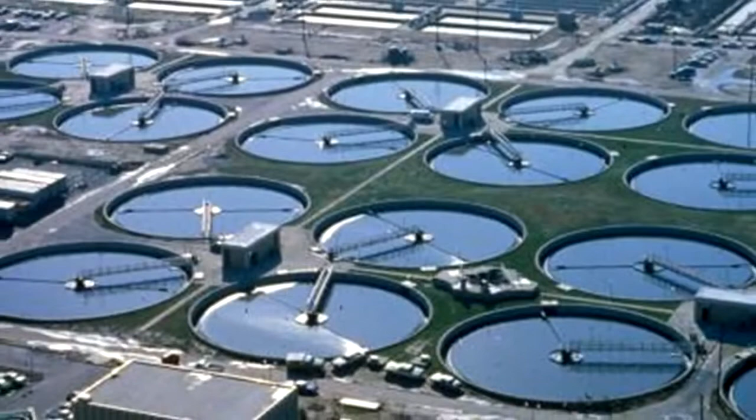Nearly everyone in the world is part of some community, whether large or small, and all of these communities have similar needs. They need light, heat, air conditioning. People can't function very well when it's too hot or too cold. They need food to be grown or provided, distributed and stored safely. They need waste products to be collected, removed, and processed. People in the community need to be able to get from one place to another as quickly as possible. And a supply of energy is the basis for all of these activities.

Energy in the form of electricity provides light and air conditioning. Energy in the form of heat keeps us warm, and energy in chemical form provides fertilizer, drives farm machinery, and transportation energy. Now, I spent 10 years working at NASA.

In the beginning of my time there in 2000, I was very interested in communities, but this is the kind of community I was thinking of: a lunar community. It had all of the same needs as a community on Earth would have, but it had some very unique constraints. And we had to think about how we would provide energy for this very unique community.

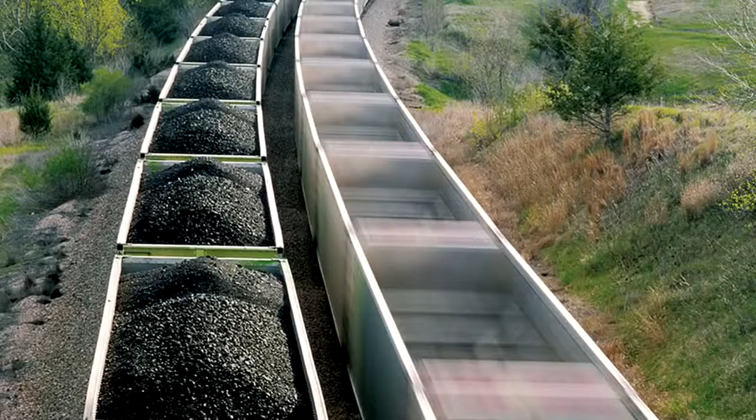There's no coal on the moon. There's no petroleum. There's no natural gas. There's no atmosphere. There's no wind either. And solar power had a real problem.

The moon orbits the Earth once a month. For 2 weeks, the sun goes down and your solar panels don't make any energy. If you want to try to store enough energy in batteries for 2 weeks, it just simply isn't practical.

So nuclear energy was really the only choice. Now, back in 2000, I really didn't know too much about nuclear power, so I started trying to learn.

Almost all of the nuclear power we use on Earth today uses water as a basic coolant. Now, this has some advantages, but it has a lot of disadvantages. If you want to generate electricity, you have to get the water a lot hotter than you normally can. At normal pressures, water will boil at 100 degrees Celsius. This isn't nearly hot enough to generate electricity effectively.

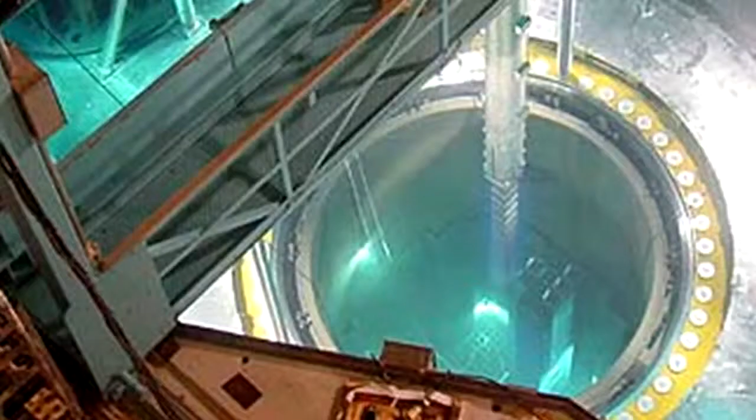So water-cooled reactors have to run at much higher pressures than atmospheric pressure. Some water-cooled reactors run at over 70 atmospheres of pressure, and others have to run at as much as 150 atmospheres of pressure. There's no getting around this. It's simply what you have to do if you want to generate electricity using a water-cooled reactor.

And this means that you have to build a water-cooled reactor as a pressure vessel with steel walls over 20 centimeters thick. If that sounds heavy, that's because it is.

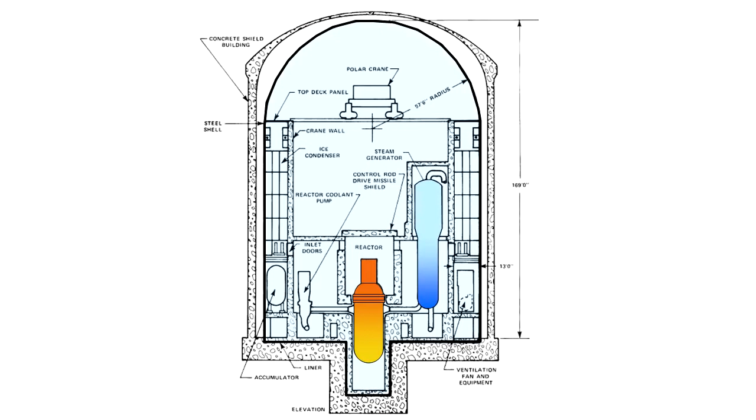Things get a lot worse if you have an accident where you lose pressure inside the reactor. If you have liquid water at 300 degrees Celsius and suddenly you depressurize it, it doesn't stay liquid for very long. It flashes into steam. So water-cooled reactors are built inside of big, thick concrete buildings called containment buildings, which are meant to hold all of the steam that would come out of the reactor if you had an accident where you lost pressure. Steam takes up about 1,000 times more volume than liquid water, so the containment building ends up being very large relative to the size of the reactor.

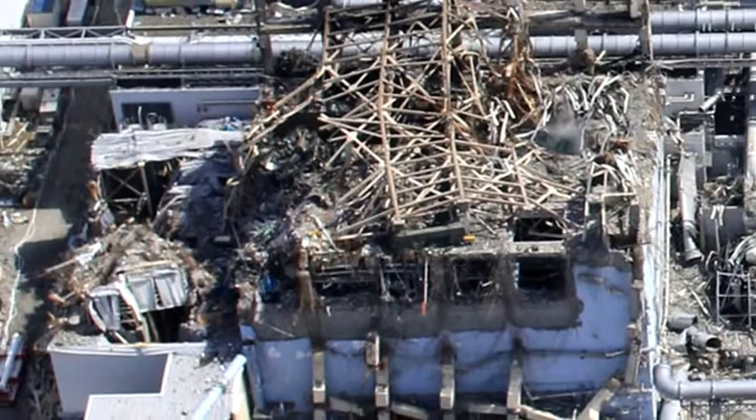Another bad thing happens if you lose pressure and your water flashes to steam. If you don't get emergency coolant to the fuel in the reactor, it can overheat and melt. Now, the reactors we have today use uranium oxide as a fuel. It's a ceramic material similar in performance to the ceramics that we use to make coffee cups or cookware, or the bricks we use to line fireplaces. They're chemically stable, but they're not very good at transferring heat.

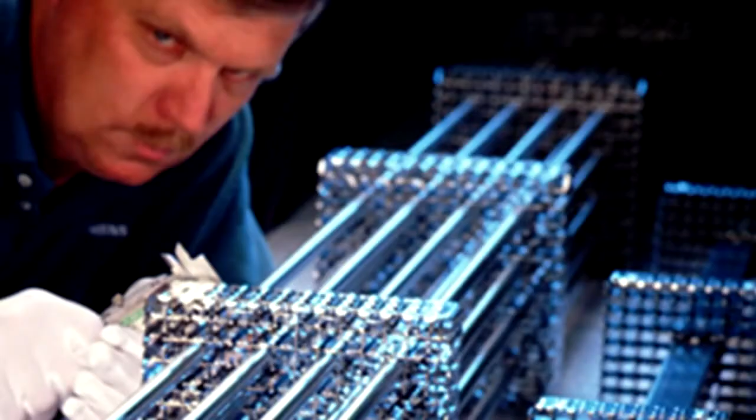If you lose pressure, you lose your water, and soon your fuel will melt down and release the radioactive fission products within it. Making solid nuclear fuel is a complicated and expensive process, and we extract less than 1% of the energy from the nuclear fuel before it can no longer remain in the reactor.

Water-cooled reactors have another additional challenge. They need to be near large bodies of water where the steam they generate can be cooled and condensed. Otherwise, they can't generate electrical power. Now, there's no lakes or rivers on the moon. So if all of this makes it sound like water-cooled reactors aren't such a good fit for a lunar community, I would tend to agree with you.

You see, I had the good fortune to learn about a different form of nuclear power that doesn't have all these problems for a very simple reason. It's not based on water cooling, and it doesn't use solid fuel. Surprisingly, it's based on salt. One day I was in a friend's office at work, and I noticed this book on the shelf, Fluid-Fueled Reactors, and I was interested and asked him if I could borrow it. Inside that book, I learned about research in the United States back in the 1950s into a kind of nuclear reactor that wasn't based on solid fuel or on water cooling. It didn't have the problems of the water-cooled reactor, and the reason why was pretty neat.

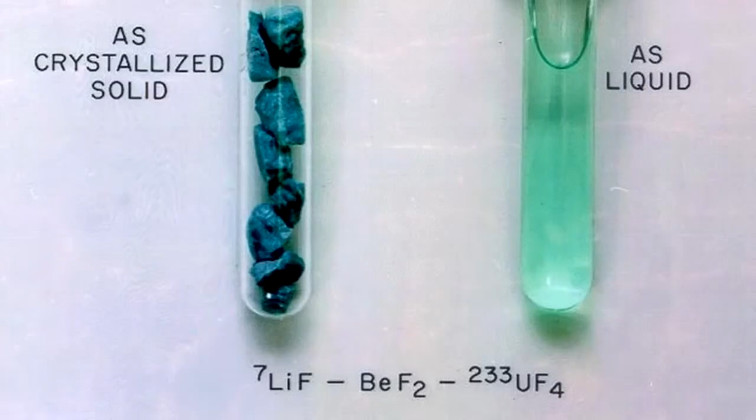It used a mixture of fluoride salts as a nuclear fuel, specifically the fluorides of lithium, beryllium, uranium, and thorium. Fluoride salts are remarkably chemically stable. They do not react with air and water. You have to heat them up to about 400 degrees Celsius to get them to melt, but that's actually perfect for trying to generate power in a nuclear reactor. Here's the real magic: they don't have to operate at high pressure.

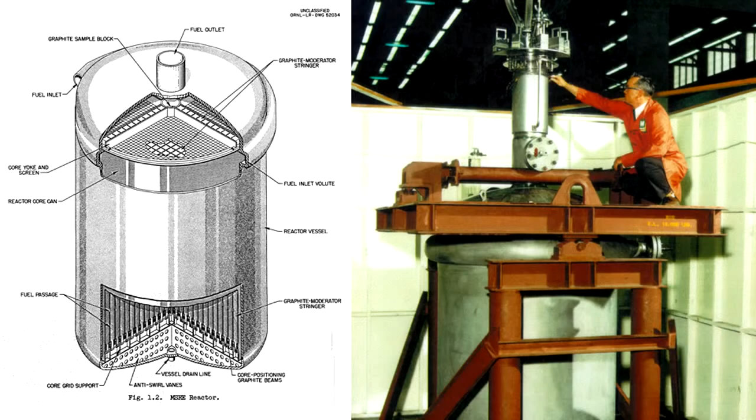And that makes the biggest difference of all. This means that they don't have to be in heavy, thick steel pressure vessels. They don't have to use water for coolant, and there's nothing in the reactor that's going to make a big change in density like water. So the containment building around the reactor can be much smaller and close-fitting.

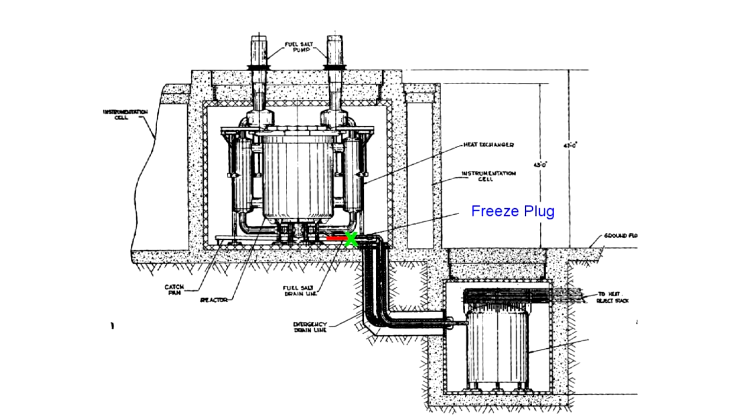Unlike the solid fuels that can melt down if you stop cooling them, these liquid fluoride fuels are already melted at a much, much lower temperature. In normal operation, you have a little plug here at the bottom of the reactor vessel. This plug is made out of a piece of frozen salt that you've kept frozen by blowing cool gas over the outside of the pipe.

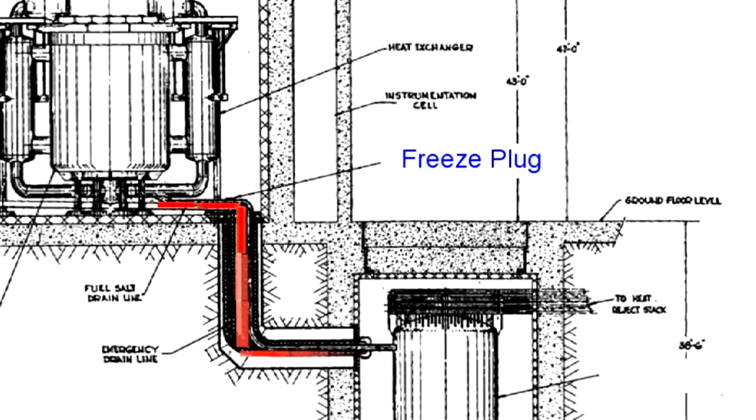If there's an emergency and you lose all the power to your nuclear power plant, the little blower stops blowing, the frozen plug of salt melts, and the liquid fluoride fuel inside the reactor drains out of the vessel, through the line, and into another tank called a drain tank. Inside the drain tank, it's all configured to maximize the transfer of heat, so as to keep the salt passively cooled as its heat load drops over time.

In water-cooled reactors, you generally have to provide power to the plant to keep the water circulating and to prevent a meltdown, as we saw in Japan. But in this reactor, if you lose the power to the reactor, it shuts itself down all by itself without human intervention and puts itself in a safe and controlled configuration.

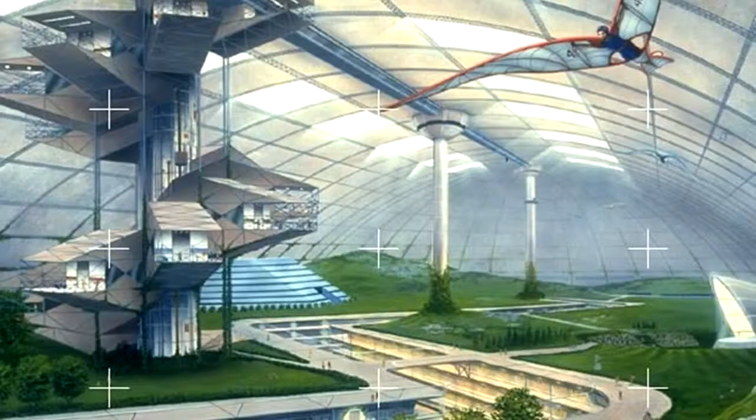Now, this was sounding pretty good to me, and I was getting excited about the potential of using a liquid fluoride reactor to power a lunar community. But then I learned about thorium, and the story got even better.

Thorium is a naturally occurring nuclear fuel that is 4 times more common in the Earth's crust than uranium. It can be used in liquid fluoride thorium reactors to produce electrical energy, heat, and other valuable products. It's so energy dense that you can hold a lifetime supply of thorium energy in the palm of your hand.

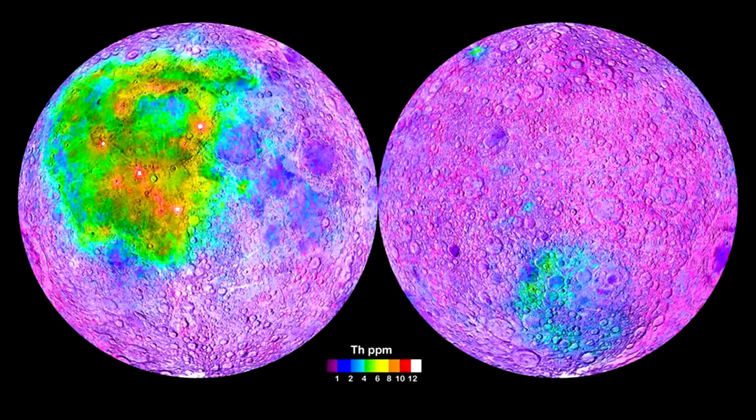Thorium is also common on the moon and easy to find. Here's an actual map of where the lunar thorium is located. Thorium has an electromagnetic signature that makes it easy to find even from a spacecraft.

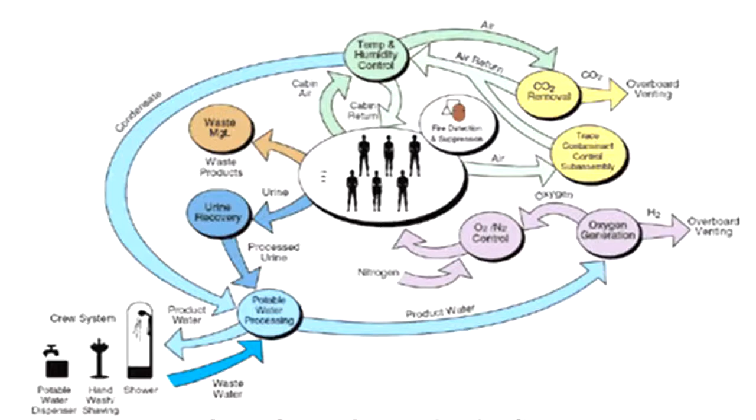With the energy generated from a liquid fluoride thorium reactor, we can recycle all of the air, water, and waste products within the lunar community. In fact, doing so would be an absolute requirement for success. We could grow the crops needed to feed the members of the community even during the 2-week lunar night using light and power from the reactor.

It seemed like the liquid fluoride thorium reactor, or LFTR, could be the power source that could make a self-sustainable lunar colony a reality. But I had a simple question: if it was such a great thing for a community on the moon, why not a community on the Earth?

A community of the future, self-sustaining and energy independent. The same energy generation and recycling techniques that can have a powerful impact on surviving on the moon could also have a powerful impact on surviving on the Earth.

Right now we're burning fossil fuels because they're easy to find and because we can. Unfortunately, they're making some parts of our planet look like the moon. Using fossil fuels entangles us in conflict in unstable regions of the world and costs money and lives. Things could be very different if we were using thorium.

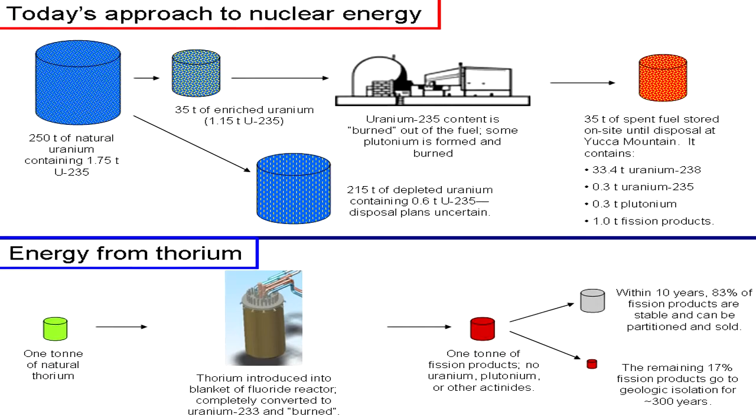You see, in a LFTR, we could use thorium about 200 times more efficiently than we're using uranium now. And because the LFTR is capable of almost completely releasing the energy in thorium, this reduces the waste generated over uranium by factors of hundreds and by factors of millions over fossil fuels.

We're still going to need liquid fuels for vehicles and machinery, but we could generate these liquid fuels from the carbon dioxide in the atmosphere and from water, much like nature does. We could generate hydrogen by splitting water and combining it with carbon harvested from CO2 in the atmosphere, making fuels like methanol, ammonia, and dimethyl ether, which could be a direct replacement for diesel fuels. Imagine carbon-neutral gasoline and diesel, sustainable and self-produced.

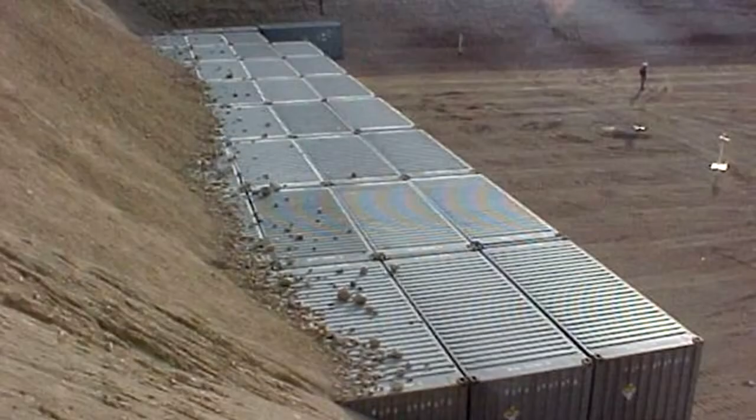Do we have enough thorium? Yes, we do. In fact, in the United States, we have over 3,200 metric tons of thorium that was stockpiled 50 years ago and is currently buried in a shallow trench in Nevada. This thorium, if used in LFTRs, could produce almost as much energy as the United States uses in 3 years.

And thorium is not a rare substance either. There are many sites like this one in Idaho, where an area the size of a football field would produce enough thorium each year to power the entire world.

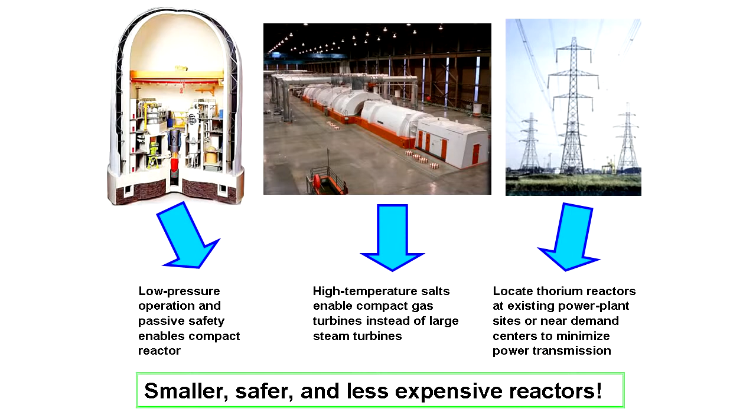Using liquid fluoride thorium technology, we could move away from expensive and difficult aspects of current water-cooled, solid-fueled uranium nuclear power. We wouldn't need large, high-pressure nuclear reactors and big containment buildings that they go in. We wouldn't need large, low-efficiency steam turbines.

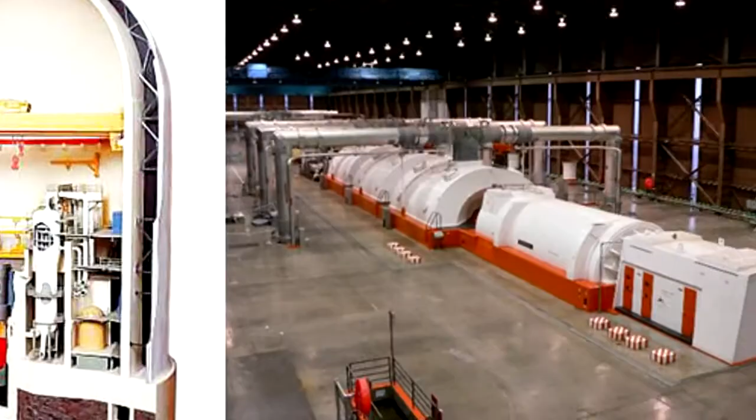We wouldn't need to have as many long-distance power transmission infrastructure because thorium is a very portable energy source that can be located near to where it is needed. A liquid fluoride thorium reactor would be a compact facility, very energy efficient and safe, that would produce the energy we need day and night and without respect to weather conditions.

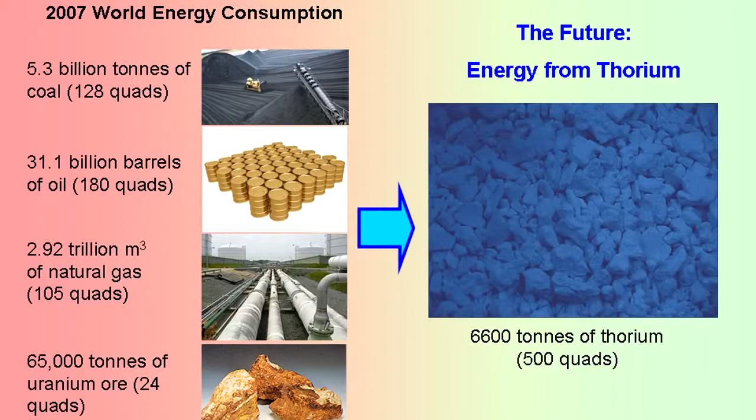In 2007, we used 5 billion tons of coal, 31 billion barrels of oil, and 3 trillion cubic meters of natural gas, along with 65,000 tons of uranium to produce the world's energy. With thorium, we could do the same thing with 7,000 tons of thorium that could be mined at a single site.